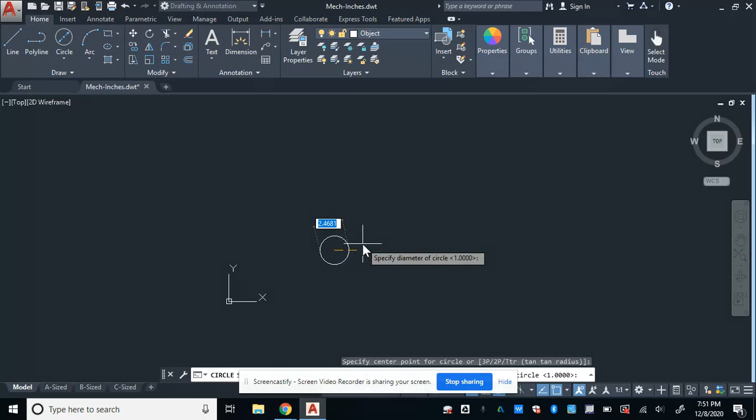It also tells me the diameter is 1.5, so I'll choose center diameter. I'll place it randomly here, doesn't really matter. I'm going to type 1.5 for the diameter. So there is the bottom hole for my rocker arm. Next I'm going to choose the circle diameter again. I'm going to make sure that my object tracking point for center is turned on, which it is.

I'm going to just touch the edge of my circle. There's my plus symbol that represents the center. I'm not going to click it, I'm just letting my mouse hover over it. Once it says center, I know that a tracking point has started. I'll then drag my mouse to the right, hold Control, right click, and choose temporary track point.

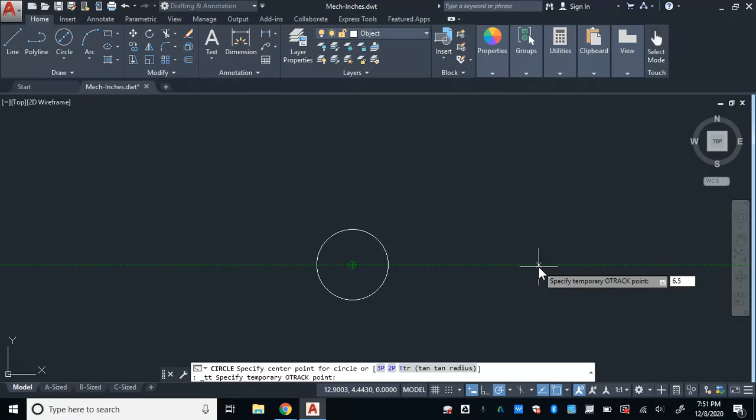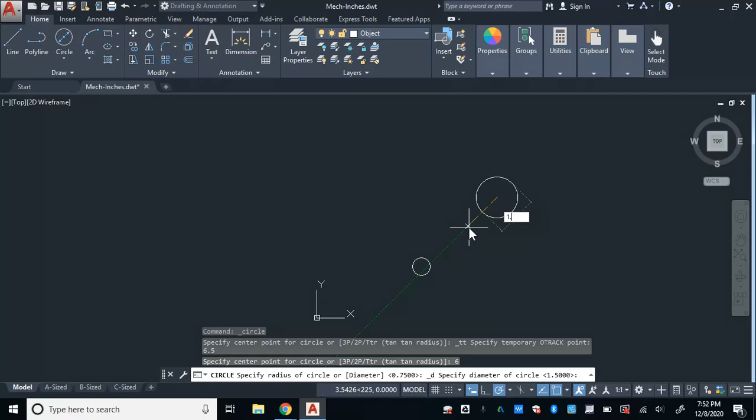Now that I'm to the right, I'm going to type 6.5, enter. You can see that little plus symbol show up. That's the tracking point, 6.5 inches away from the center of that circle. Now I'll move my mouse above that tracking point and type 6, hit enter. Now a circle has started at that exact location. The diameter is 1.5. I hit enter, and there is the top right hole for my rocker arm.

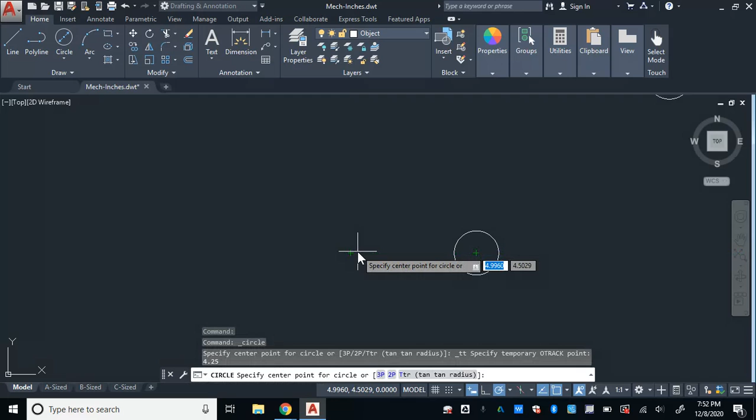I'm going to use center diameter again. Go down here to my circle. Let my mouse hover over the center mark. Drag my mouse to the left, hold Control, right click, choose temporary track point, and I'm going to type 4.25, enter. And then I'll place my mouse above that temporary tracking point and type 4.25 again.

Hit enter. There's my circle, and I want the diameter to be 1.5. Right, so there's my bolt pattern or rod pattern, whatever you want to think of it as, for my rocker arm. Now that I have that drawn, I need to draw the outside perimeter of my rocker arm.

The best way to do that would be to draw. Once again, remember I said it for project 1: mostly all the shapes drawn in AutoCAD are drawn with respect to lines and circles. And we can trim, cut, stretch, elongate, whatever I need to do to alter those two shapes to get me any kind of shape I want.

So what I'm going to do is draw using the idea of making sure that they're concentric to one another. I'm going to draw a circle around this one, the top left, draw another circle around the bottom, and then draw another circle around the top right to get me the outside perimeter curve of my rocker arm.

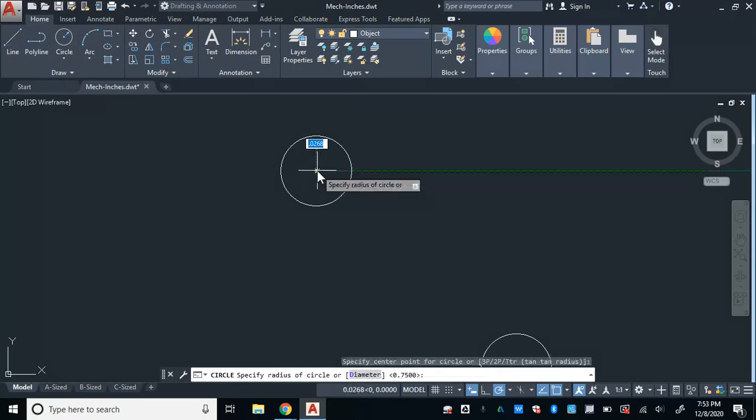In this case, it's with respect to the radius, so I'll choose my command to be center radius. And the top left, the radius of that one is 1.25. The bottom has a radius of 1.5. And the top right is 1.25.

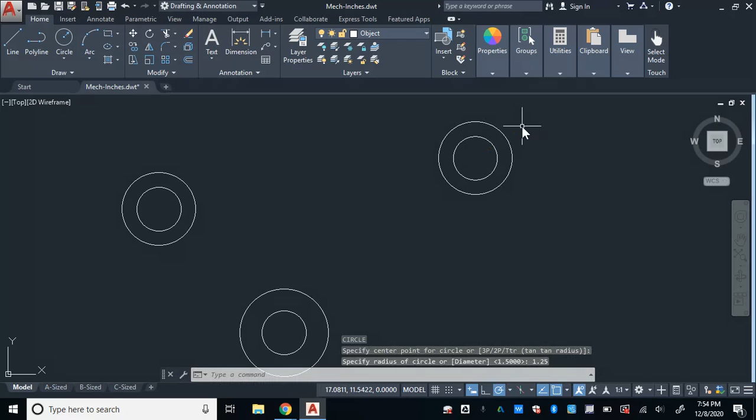All right. Next, I need to draw the lines that go from this circle to that circle. You only want the line to touch in one specific spot. So I'm going to go up to the line command, and I'm going to type tan in the command line, hit enter. Choose this circle. And just like I showed in the other projects, that line now is always going to be tangent to that curve.

And before I go to try to click the other circle, I'm going to type tan in the command line again, hit enter, and I'm just going to touch on the edge of the circle, and I'll hit enter to finish the command. And now I know that this line is tangent to this circle, and this line is tangent to that circle.

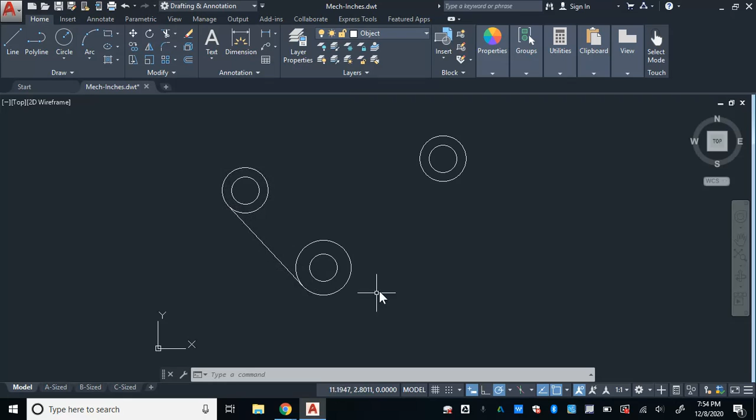I'm going to open up the line command again. I'm going to type tan in the command line, hit enter, select this circle. I'm going to go back down to the command line, type tan again, hit enter, and select this circle. And now that is my right side of my rocker arm. That's tangent to both circles.

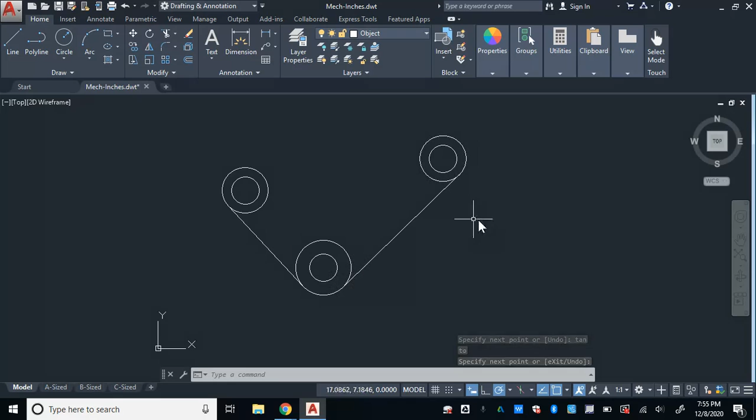The top circle has an arc that kind of curves down and connects to both circles. It touches only this circle in one spot, somewhere on this circle only in one spot, and has a nice fluid curve here. So it tells me that the radius is 7.25. And I also know from looking at the drawing and given what it says in the book that it should only touch this side and this side on either side there.

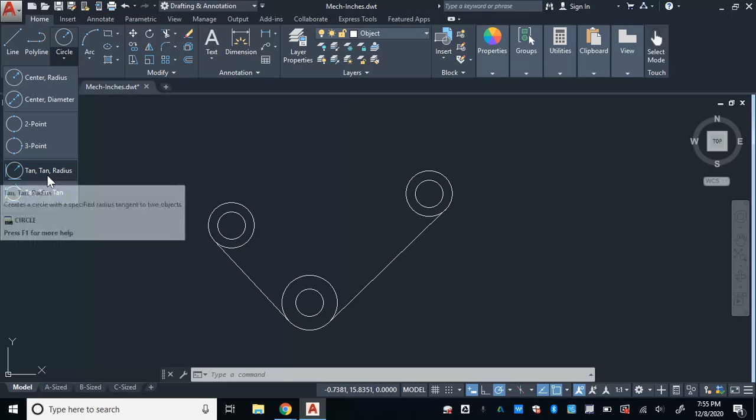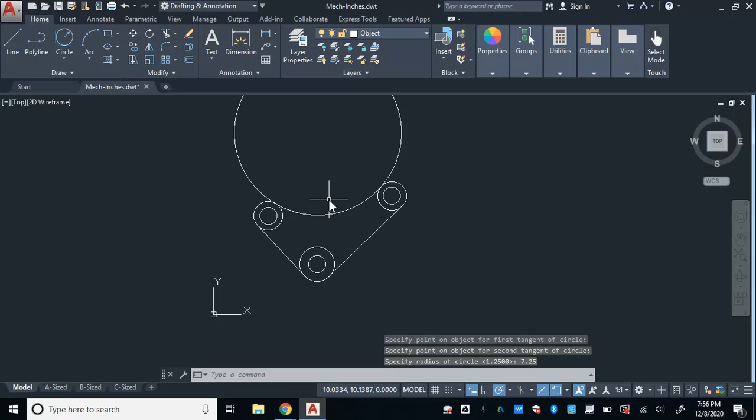So I'm going to go to circle, go to tan tan radius. This is the command that I want to use to draw this. And in fact, the book tells you that is what you should use to do this. So tan radius. I'm going to select this as my tangent, select this side as my tangent. And now I want the radius to be 7.25. So basically, it forms a circle here that is tangent to both circles, and it has a radius of 7.25.

Now, to clean it up and make it look like the rocker arm is supposed to look in the book, I'm going to trim it now. I'll go down here and I'll type all. Oops, I think I messed up. I'll redo this here. Trim, go down here, I'm going to type all, hit enter, select everything.

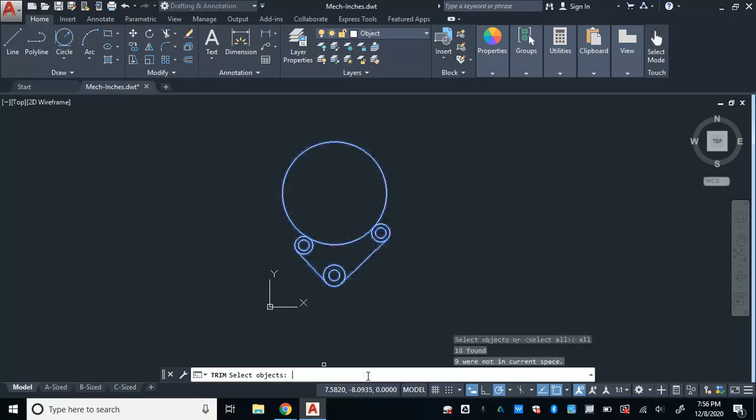And now I'm going to trim away what I don't need. I don't need this outer portion of my circle. I also don't need these inner portions of my circle. And I just made my rocker arm for chapter 13.4.